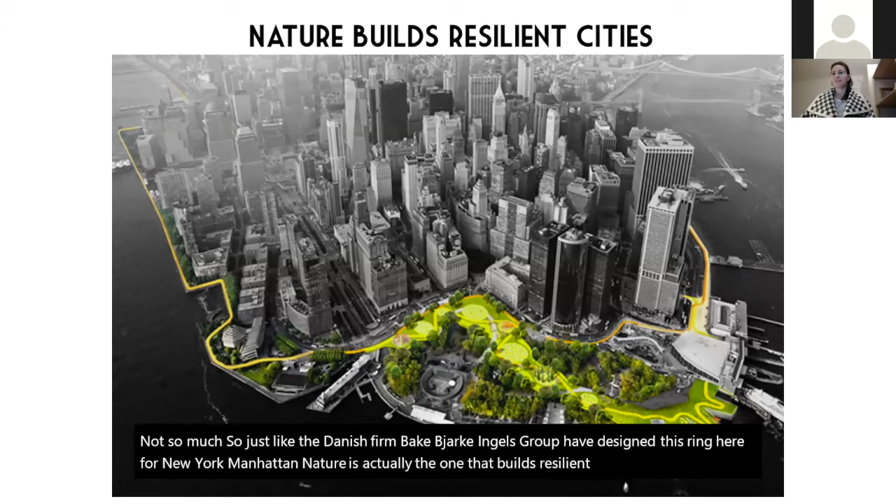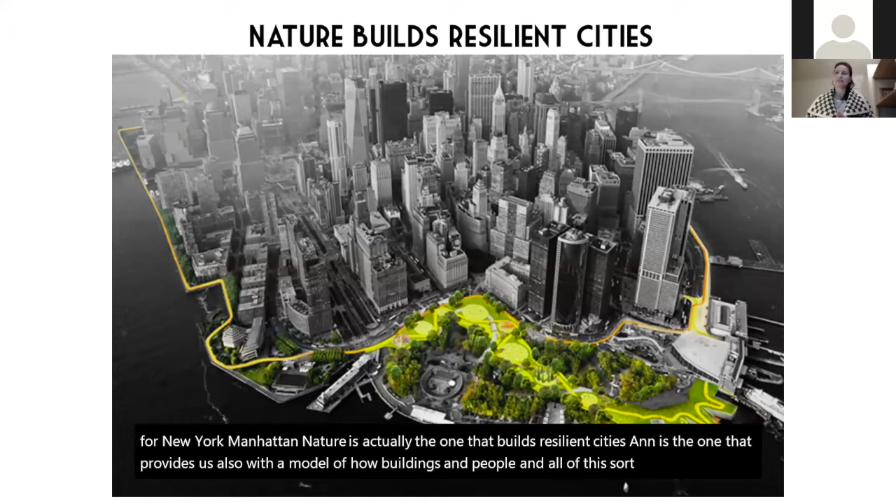But what does that mean? Does that mean that technology is sort of taking over and solving our problems? Not so much. So just like the Danish firm BIG, Bjarke Ingels Group, have designed this ring here for New York, Manhattan. Nature is actually the one that builds resilient cities and is the one that provides us with a model of how buildings and people and all of this life and activities communicate with each other and provide the information that is necessary to move the city

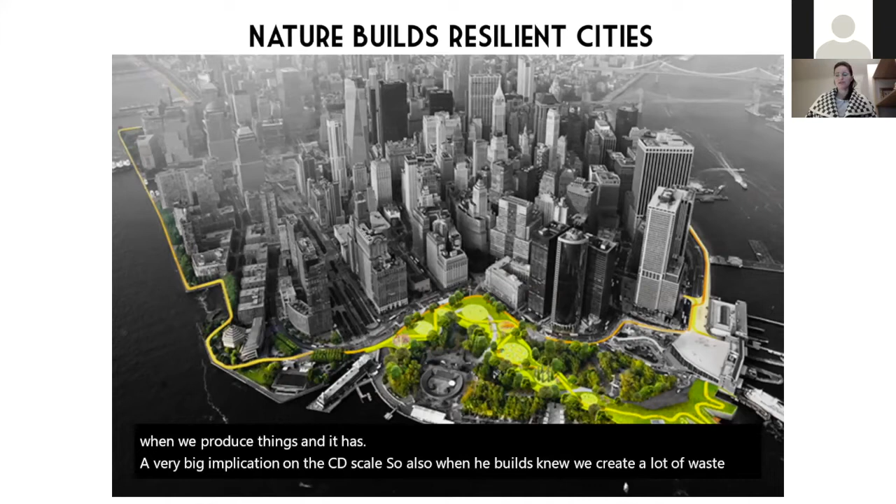into the future. And that being said, it's also important that this is done in a more efficient way, because the main issue that we have these days is this gross inefficiency when we produce things, and it has a very big implication on the city scale. So also when we build new, we create a lot of waste. And when we retrofit, it's actually saving emissions, both during and after.

So Copenhagen is focusing a lot on using nature as a tool, sort of allowing and re-inviting water into the city. We are placed on the coast, and water is a very important identity in the city's inner core and former harbor facilities. You see a lot of great photos from that, especially from summertime when you Google Copenhagen. But it's a lot into the city as well.

So the city is actually made out of different built islands, city blocks that have the buildings on the sides. And then inside you have these courtyards, sometimes bigger, sometimes smaller. And then, of course, a network of parks, which takes up a larger scale of the city. The idea first is to work with the smaller scale and to empower communities to transform these neighborhoods.

And of course, it takes a lot of communication. It takes a lot of networking. It takes a lot of infrastructure for learning from case to case and taking this to the city scale. And another one is this network of biodiversity corridors that have to be created to connect the different larger green areas so that life can actually flourish in the city as well. As you know, the bees are finding their homes in here because in the countryside there are too many pesticides and they cannot live there.

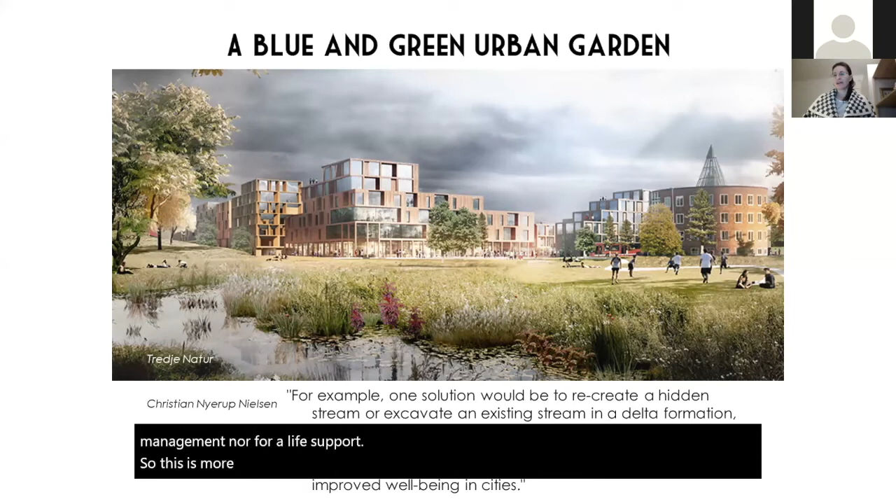So turning water into an asset, that will be the blue infrastructure. And the green infrastructure is actually inviting more nature, not just lollipop trees, but a real network of diversity when it comes to green, and reducing to a minimum the desert of grass, as we call it. That is not productive, not useful, neither for water management nor for life support. So this is more or less the Copenhagen approach, working with nature.

And then, of course, we come to this smart city idea. You'll hear that a lot of it is connected to technology, so embedding sensors everywhere and knowing a little bit where we are. But this has a lot more to do with people than it has to do with technology.

There's this idea of using the pre-existent grid. In Denmark, we have district heating, and we have all the cables for internet and phone and television. Everything that is providing our services in our households is actually to be found under the street level.

And then, of course, this is not synchronized. This is not coordinated. And every single time that you have to do either improvements in an area, or you have to climate adapt, or you have to build new, then these services have to be in top shape and they have to be installed first. But they do take up a lot of time and a big chunk of the budget because there's no coordination between the different actors.

For instance, just close to where I'm now, we have the light rail project, which will be done in 2025. It's a light rail that will connect north and south on Ring 3 of Copenhagen. So the city is growing in concentric circles, but incomplete because there's water on this side. So this will be a connection between the university and the north, and all of the different settlements in the greater area of Copenhagen, and the light rail will just run by that.

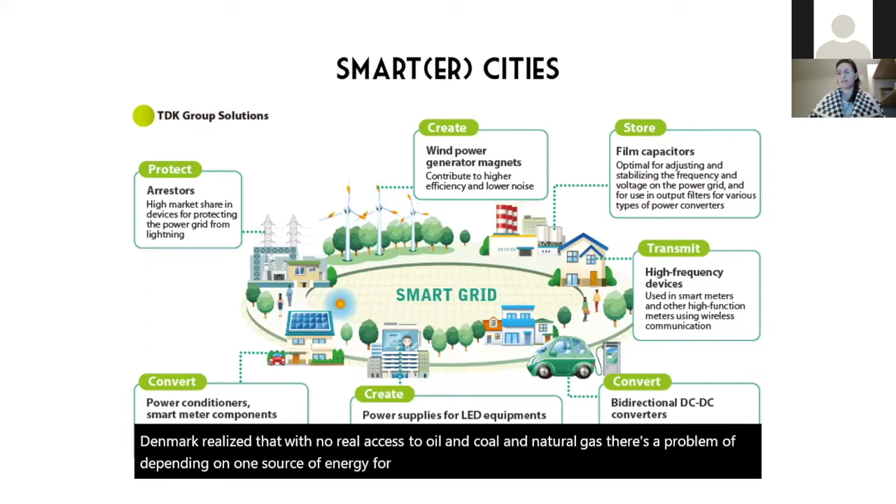And then there's also a philosophy here in Denmark, a policy that started after '73, which is the first oil crisis that actually hit development beginning after the Second World War. And Denmark realized that with no real access to oil and coal and natural gas, there's a problem of depending on one source of energy for every single part of our lives. So at that time, HOFOR, which is the main supplier for energy, had to become nonprofit.

So what does that mean? It means that every single profit that they make on selling the hot water for the district heating for our homes actually has to go back into improving that infrastructure. So every single year they have to come to zero, and they have to keep the infrastructure at a very high standard and functioning level to reduce water consumption, to reduce heat loss, and that you can only do when you have a structure like that.

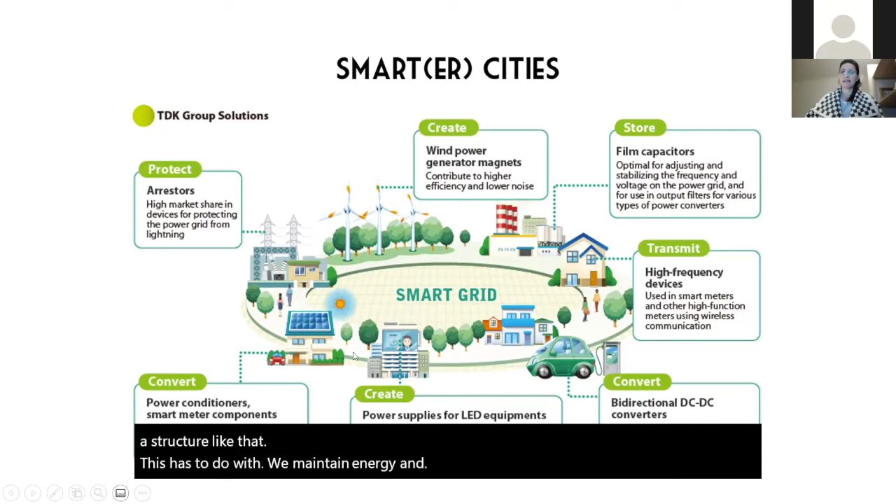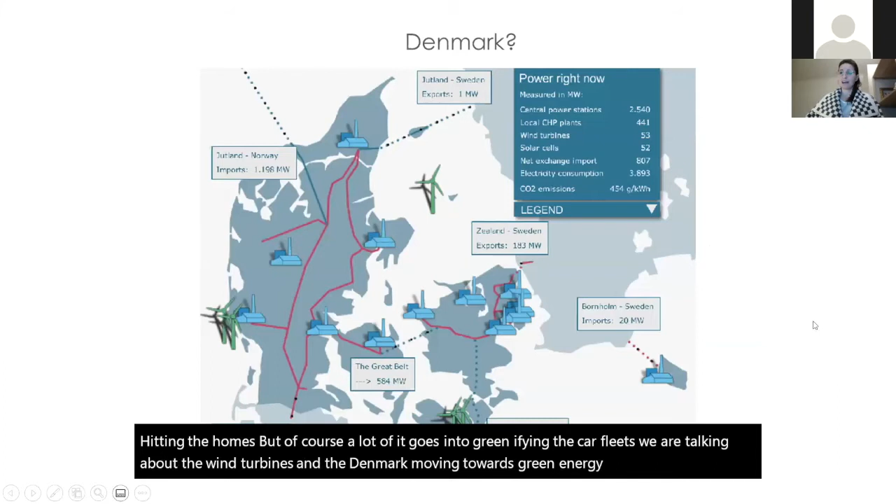So we named energy and heating the homes, but of course a lot of it goes into greenifying the car fleet. We are talking about the wind turbines and Denmark moving towards green energy. And for that we have something else which is called Energinet, and it's situated on Jutland here. I hope you can see my little arrow.

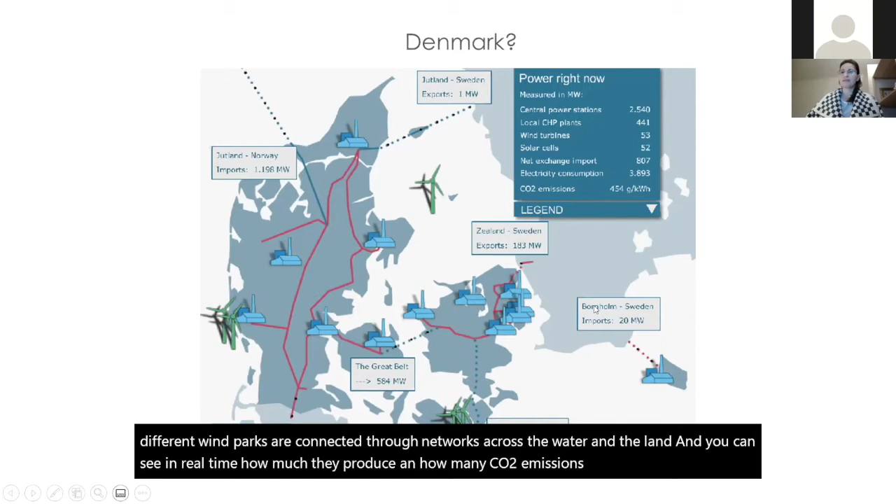And what does this do? This is actually situated in the middle of the country. And then all of the different wind parks are connected through networks across the water and the land. And you can see in real time how much they produce and how many CO2 emissions are actually saved. And there's a lot of people that also have shares in this infrastructure.

So Energinet is basically a company that is private, but it was formed by the state in the first instance. And what it does is it regulates and builds the network for the different citizens, cooperatives, or firms to connect their energy-producing windmills or wind parks.

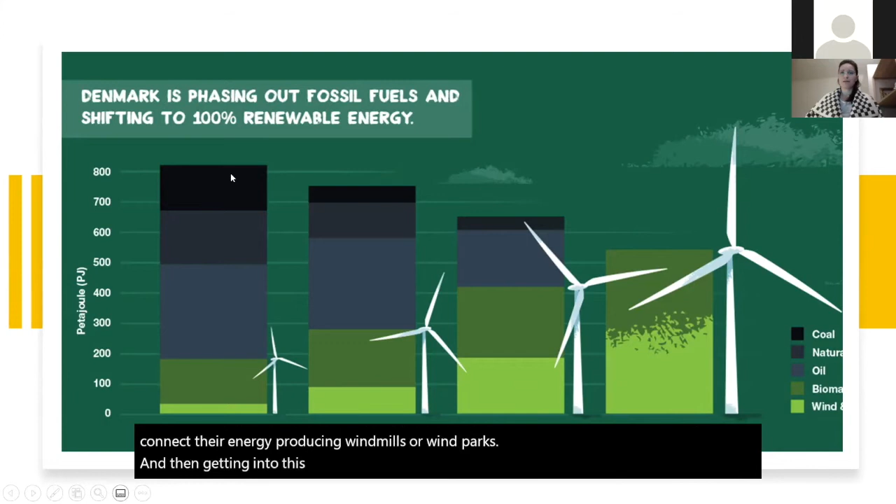And then getting into this transition, when Denmark wants to be carbon neutral in 2025. So you see in 2010 the percentages of how much the wind will cover. And you see two different colors. We have biomass as well. Another project by BIG, Bjarke Ingels Group, is taking the waste in Copenhagen and burning it to produce energy, and again, hot water that goes into our radiators to heat our homes.

And then growing in 2020 and easily replacing coal until everything is only biomass and wind. There's already big projects going on in this direction. But that being said, you have these small units that produce the energy, but you need to have a coordinated entity that can regulate the price, can provide the infrastructure, and that can only be public. So that's why Energinet exists, and it functions more or less like HOFOR does.

And this is sort of a chart to give you an idea of how much the energy consumption has been reduced, because that's also another very important part. We have to build our activities and our cities in such a way that we reduce the energy demand. That's one very important step, because, as mentioned in the beginning of this, we are not very efficient.

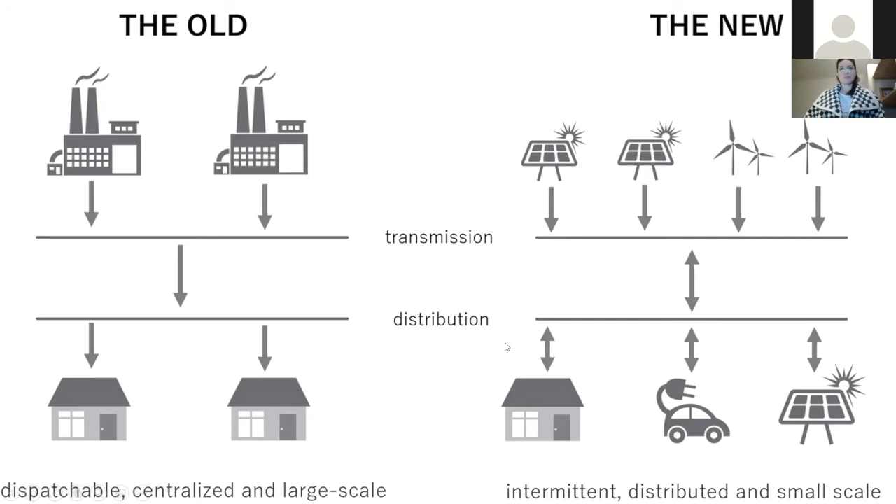And then it can provide for the households and for our mobility. So of course, this poses some technological challenges, but it needs technology and it needs people to run it. What does that look like on the city scale?

This is an example from Hamburg, where they have created this building that uses the wave energy to provide some of the electricity. It uses solar panels and photovoltaics, one for the energy and another one for the hot water, so that it is completely self-sufficient.

So today, the buildings are enormous poles of energy. They use a lot of it, and they could instead produce the energy that they need. And sometimes, depending on how much the sun is shining and how much the wind is blowing, or the waves are at high speed, they can produce energy that can be fed through the network into the city in other places where this is not possible.

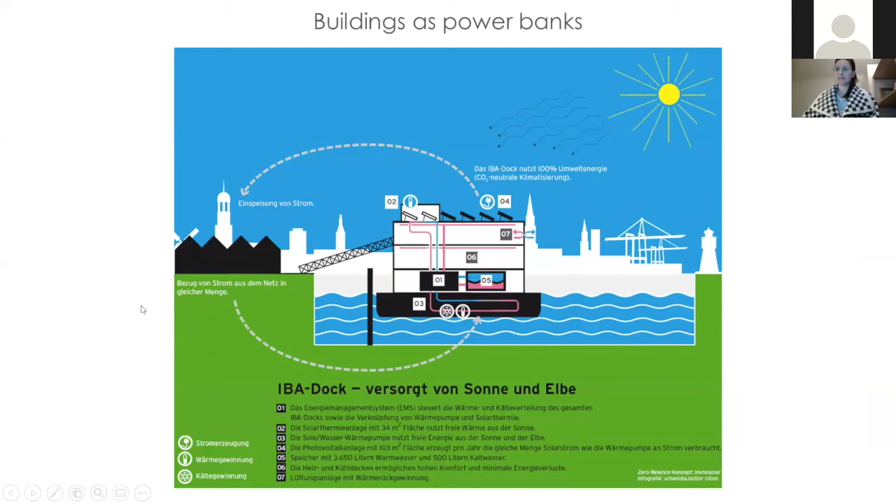The concept is more or less this sustainable by design idea, at the building scale, but this can be also extrapolated to a city level. The building is actually made out of physical elements in the structure, in the facade. And then, of course, every step of the way, there's a decision about how it will look and how it will accommodate its users.

So as well as playing with the form and the materials with the passive elements, you can also play with the active elements, which are the actual heating that you can put into the building, or the cooling. And how do you produce that energy? It can be algae facades. It can be, as illustrated here, where you take the energy from the earth, the geothermal, and heat up the building.

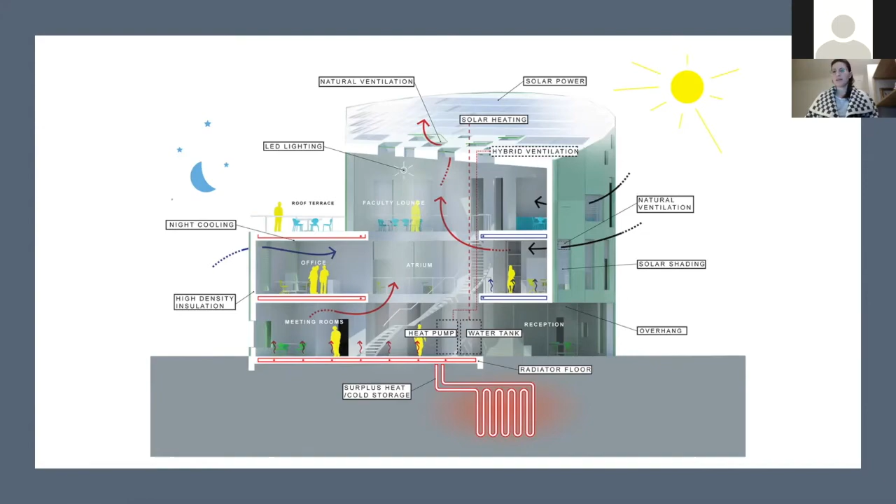At the bigger scale, of course, this also has to be coordinated, because you need to collect the energy where it's at. You can also take the shape and the form of the different city blocks and the way you design them so that you make this process much more efficient, so as not to waste the energy. So let's see how Copenhagen has done it. There are a lot of brownfield areas in the harbor part where the big industries have left the city.

There's a little bit left here in what you see in Refshaleøen, but then everything else has been transformed on the south side in the central part of the city, of the old city. And then what you see here big in red, it's actually the part that I'm going to talk about. And you see that it is huge.

So it's called Nordhavn. It's actually the Northern Harbor. And this is its location in Copenhagen. It's 2 stops away with the metro from the city center, so you can get to it very, very fast. But it has old infrastructure, road and train infrastructure, that actually separates it from an easy pedestrian and bicycle access at this point to this area.

So this area here has started being developed in 2007. There was an international competition for how to transform this from a harbor facility that has been existing since 1901. This entire area is reclaimed land. You won't see it on any older map of the city. So everything here has been filled over the years. And then what you see here in green is actually being filled up now. So the process didn't stop.

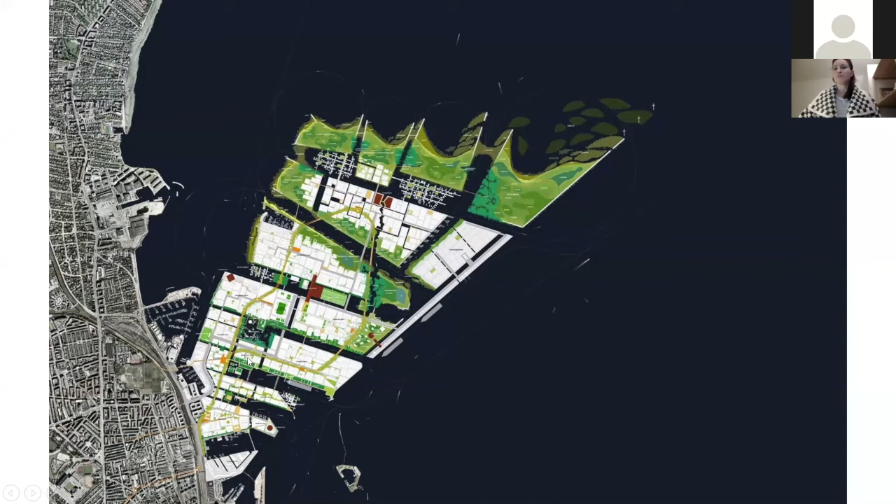This loop here is also the metro that will serve this area. So it's part of the fourth line of the metro with 2 existing stations already built at this date. And then the rest will come with the developments continuing forward. So this is also supposed to be the sustainable city of the future, Nordhavn. So this entire project has been developed around this idea of using nature as a guide. So islets and canals, blue and green city, being this city that actually preserves some of the buildings.

This is not very common in the Danish context because the work labor is actually really expensive. So the easiest thing for a lot of developers, also something that they prefer because they don't have to deal with all of the preservation and cultural thing, they just put everything down and build anew. And of course, when you do that, then you can just do a lot of the things that you would want to increase profit on selling the properties afterwards.

But this is the place where the older buildings from late 18, so closer to the city. There's also some parts from the late 1800s, but mainly from the 1900s up until Second World War. Beautiful red brick buildings, and some of the silos are kept and transformed into other activities. So keeping this identity and history, and this is a very important lesson learned from the other development that came first with the M1 and the M2.

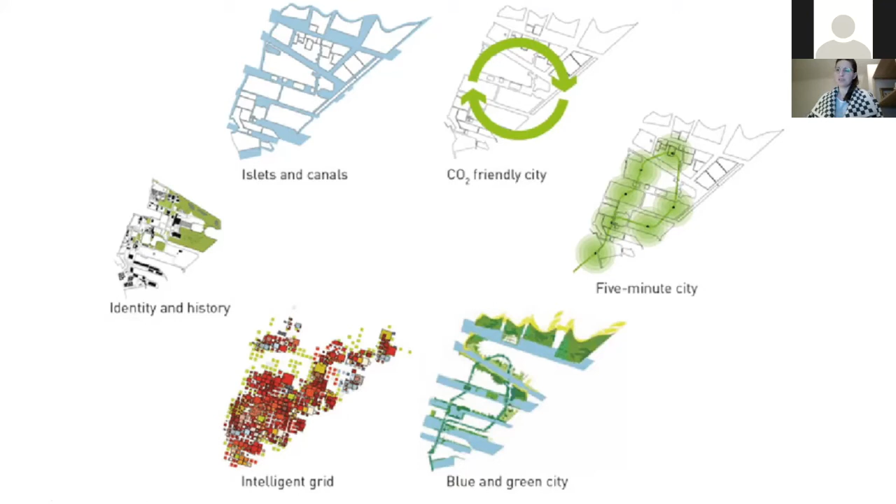cooling. Yes, cooling too. Now the wind is blowing really hard and it's quite cold outside. But summers are getting way hotter in Copenhagen, and it has been so during the past 3 years, I believe. And it's a really big change in the climate. So what does that look like?

It basically looks like, again, instead of having that big power plant, every single unit is actually contributing. You see even the little farm here with the biogas, or the networks in the city. So the facades and the roofs, they can contribute to energy and food provision. Going to come to food as well. It's not that easy to control, it's so globalized that it's not at that point where it can be easily manageable. Not at this point, and it takes a lot of political will to change that. But the city can provide a lot of space.

We have also an example of that in Copenhagen, where food, not just energy, can be produced locally, and all of the leftover space, or all of the space that is not utilized, such as the roofs or the facades, or the space in between the buildings, can serve for that. But this is mainly referring to energy at this point.

So of course we'll have some centers along the way, the nodes, to be able to connect the different infrastructures and to have this capacity of also functioning in a storm, and in the aftermath of a storm. For instance, like it happened during Sandy, where the south part of Manhattan was actually under darkness, because when everything is connected to one unit, if that unit gets damaged in such an event, then the whole city is paralyzed.

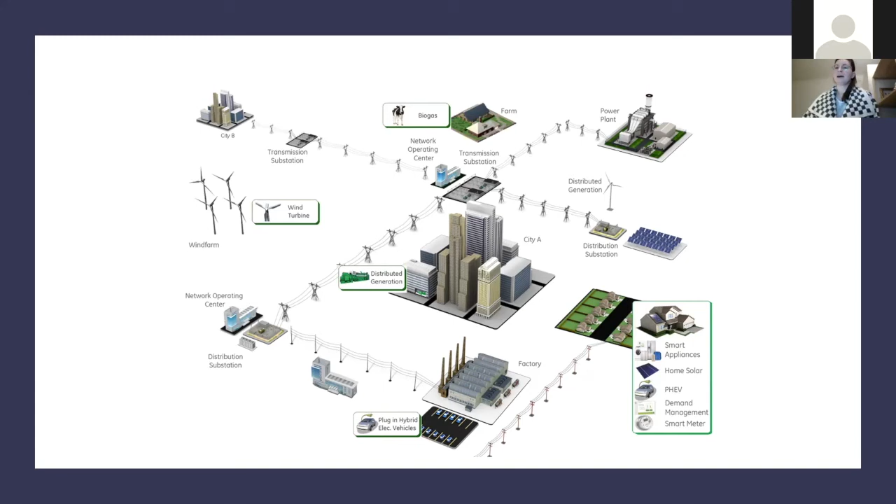And it refers, of course, a lot to the way we produce the energy. It has to come from green sources, and the way we utilize it. So everything in a house has to be smart. Smart means here more efficient. Also using what we built as an absorber of energy, just like nature is doing. And then, of course, going into mobility and empowering mobility as well, especially on a smaller scale.

In Nordhavn, it looks like this. So this is very specific to that. It actually uses surface water, streets and gray water to filter and use it locally. So having the nature elements that are cleaning the water on the spot, and then it can be released into the harbor. And then, of course, black waters are actually going to the cleaning plant.

But here we're talking about the water that comes from the roofs and all of the water that is just passing through the area, and it's just costing the city much more energy, so cleaning the water locally, referring to the gray water.

Also using cooling, but not in the sense of air conditioning, but using the water from the sea, because the sea here has a constant temperature more or less all the way throughout the year. Now the temperature during the day goes from 2 degrees, I'm talking Celsius, so 2 to 8, 9, and then it goes back again during the night, but the water stays at 9 degrees.

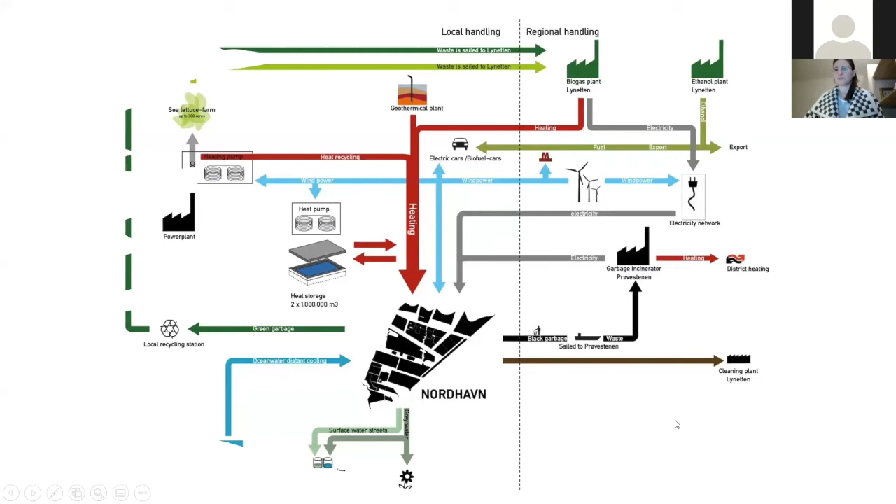So a lot of this waste and newly produced sea lettuce with the CO2 locally actually gets to be transformed into energy again. But I think it's obvious from this scheme as well that it's necessary to have this network and to have this overall thought of who does what and how do we collect, involving all the different parts in here, all the different actors, right? Because this model cannot function otherwise.

The beautiful example of this model, it's called the circular economy, and it's also called the Copenhagen model of passing from this collaborative to a neoliberal planning system, where this is opening up to the markets and the profit markets, is that this reclaimed land now can grow, because when you build a metro in the city center, it has to go in the ground. So you have to dig tunnels, and you have to do something with that earth, right?

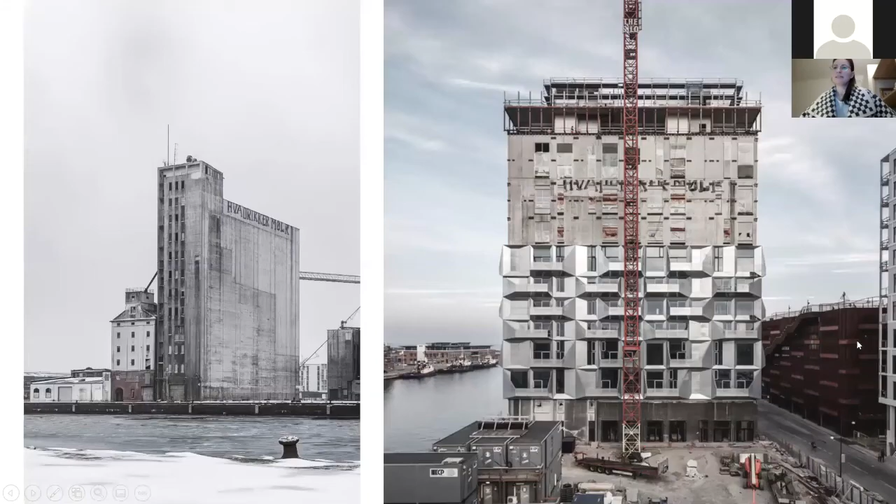So this is focus on the buildings. When we come to the energy part on the left here, you see the old corn silo that was not torn down, as is the tradition in Denmark, but it was actually kept. And you see it here to the right being transformed to apartments. And because it is so different, it has all of this extraordinary living situation surrounded by water, and so high up.

In Copenhagen, we have buildings of 5 to 6 stories high, and it's a city that incentivizes movement and walking up and down the stairs, and walking in between the buildings, and biking to keep the population healthy. This is actually a very different model. So the silo has been transformed into apartments that go from, I believe the smallest is 1,200 square feet, and the biggest one on the top here is around 4,000 square feet, so that you have a bit of an idea.

And the energy here saved is enormous, because as I mentioned before, every single building has to clear the site, has to build the foundations. And in Copenhagen, this requires a lot of energy, because the groundwater is actually really high, and you have to pump it out of the building site 24/7 before you finish raising the basement and the foundations, and then you start building above the ground. So this requires an enormous amount of energy.

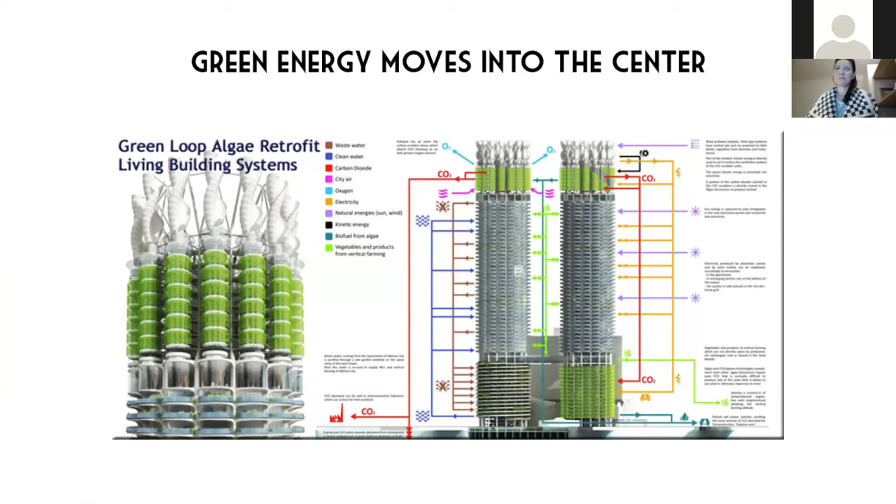Another example was using buildings as energy providers. And of course, they have to be connected to the network to feed in energy and take energy when they need it. So call it green energy moves into the city center, and it looks like this. This is one example from Nordhavn.

And it also collects rainwater so that toilets are using that. We don't flush it with the clean drinkable water. We actually flush it with the rainwater in here. And this is supposed to be, again, another idea and another invitation of thinking this further. This is not as such an integrated design as we saw previously, since the panels are added on the roof and not an integral part of the facade, but it's way better than a regular building that is consuming.

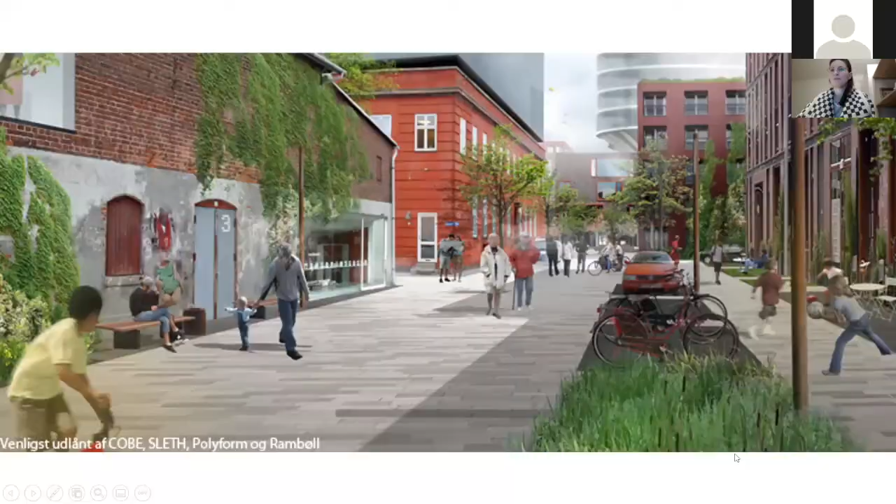This is one, and we're looking forward to the next ones, and hopefully we're going to get to that dream. So this is again the atmosphere from that place where the bicycle comes first, and public spaces and waterfronts are actually public domains, and everything is connected on this level and made for people movement. And you see some temporary parking spots in here. And these are some of the renderings.

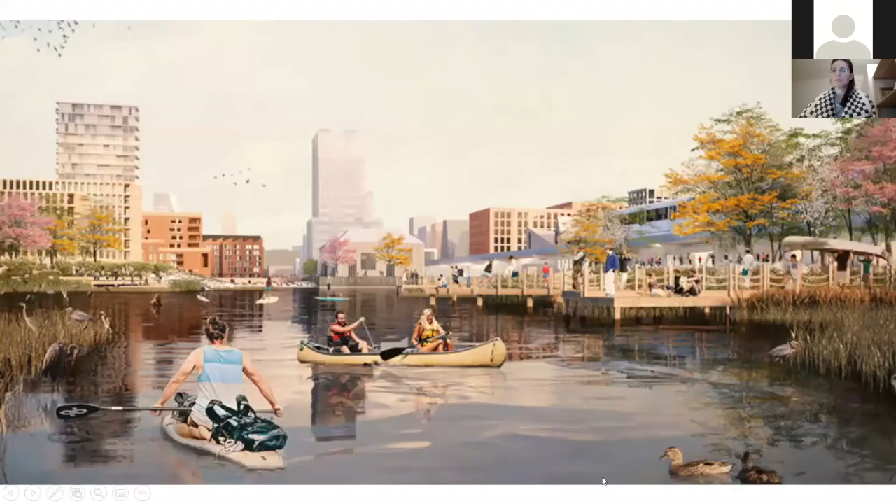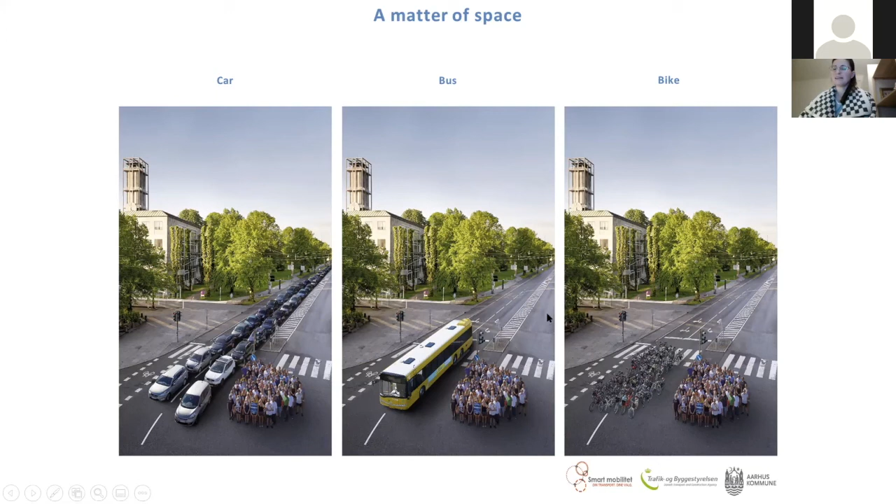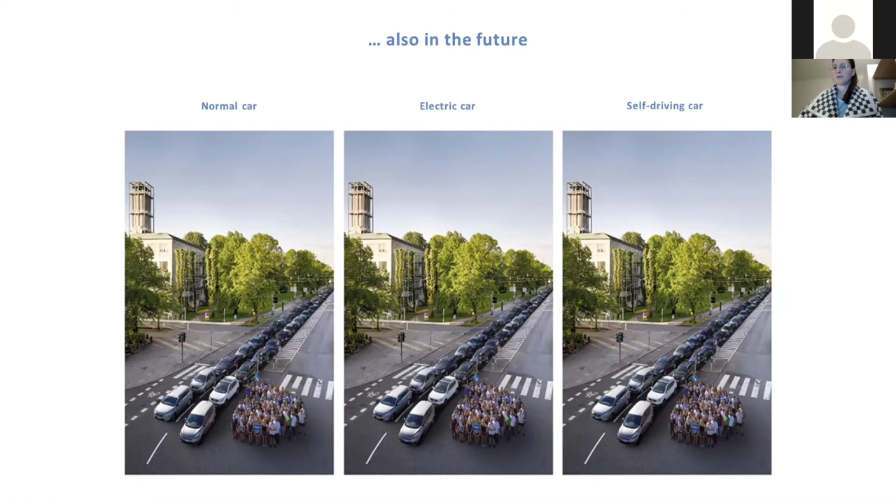And the paradigm is actually working towards this, right? So electric car, self-driving car, and here we're talking technology, and pure transformation of the old paradigm, just changing the car fleet and having the infrastructure for that. But it's still a matter of space when we talk about this. A better way of dealing with this, and the one implemented in Nordhavn mainly, is looking more at the flow on the street, because now we have traffic jams.

We've seen that when we create more road space, more cars come, and every single time we find ourselves in this gridlock situation, and it's becoming worse and worse in the bigger European cities, in the States, all over the globe. So rather than looking at the vehicle that is way bigger and heavier than we are, just to transport one person on a daily basis and be stationary 95% of the time, looking more at the capacity per hour and the space that is occupied by every single piece of infrastructure. So down here you see the space utilized by different modes of transportation, and up here you see the capacity.

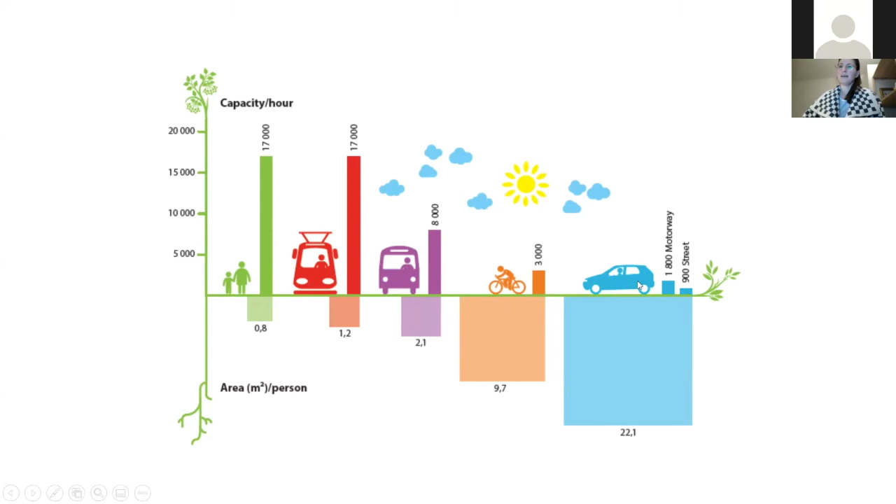So it's a very easy decision on how to move people and also how to create cities, because again, you have to build them in this mindset of transit-oriented development, and you have to build them with mobility in mind, because otherwise it will be very difficult to reverse that. For instance, when you have a very sprawled, low-density city infrastructure or settlement infrastructure, then of course you cannot pay for some of these more expensive train projects. It will be more towards the car.

Nordhavn has this little toy here as another test. Again, it's a laboratory for energy and for technology and human life. It has this electric driverless bus that goes around the block. So this is the Århusgade neighborhood. And then it goes around this, because this is still a test. It's the second city in Denmark that has this. Aalborg was the first one to have it.

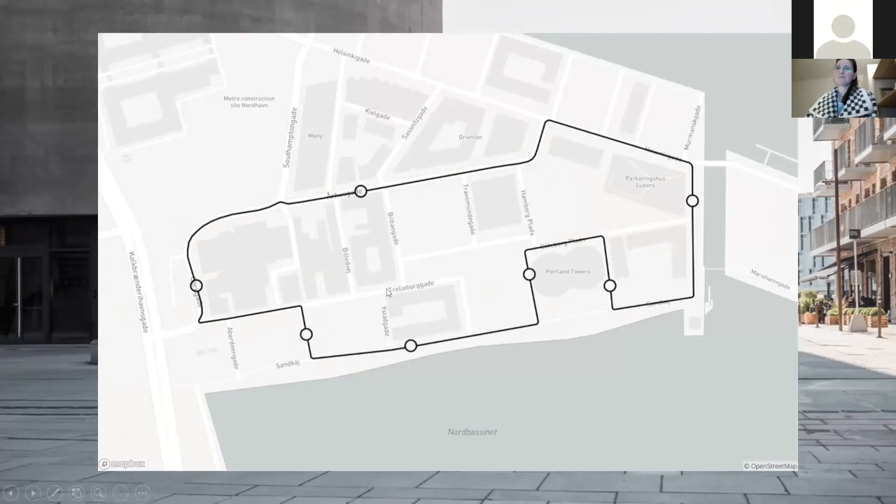And this is also collecting data. So it's not just moving people around, but it can use this capacity of collecting data on traffic, collecting data on the infrastructure, what comes on the road, and then feeding that into the system to improve the service.

So for the street traffic, when we talk smart cities, it's mainly infrastructure on how to improve the flow, so synchronize the lights. It actually made a huge difference in saving up to 15 minutes on a daily basis on the major arteries of the city. But for public transportation, it has actually shortened travel time by 5, 10 to 30 minutes, depending on where you are, and provided 85% of the Copenhageners in the inner part of the city access directly to a metro within 5 to 10 minutes.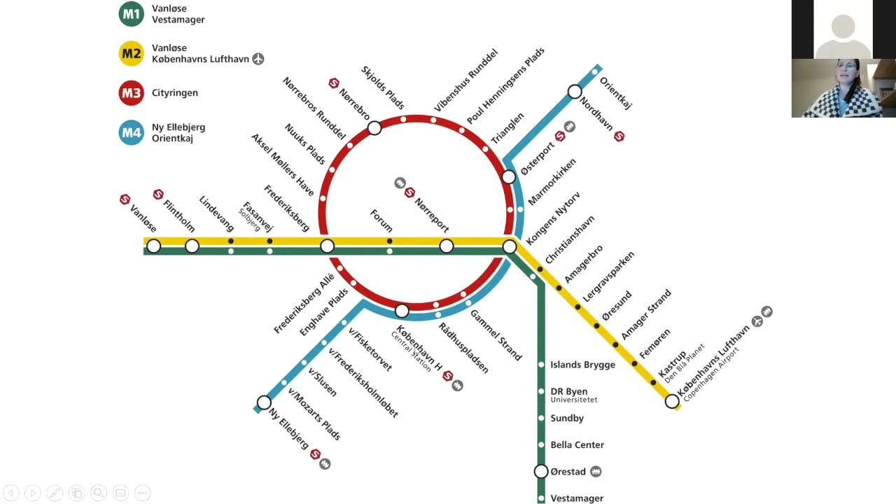So this has been a massive project, but its importance lies in connecting with the S-train infrastructure. As you see here, the different station names, and they have an S. This is the S-train, and it connects across. And then this is not to stop here. This project will continue. So this is from in between Orientkaj and Nordhavn.

It doesn't want to run. Technology has failed me today.

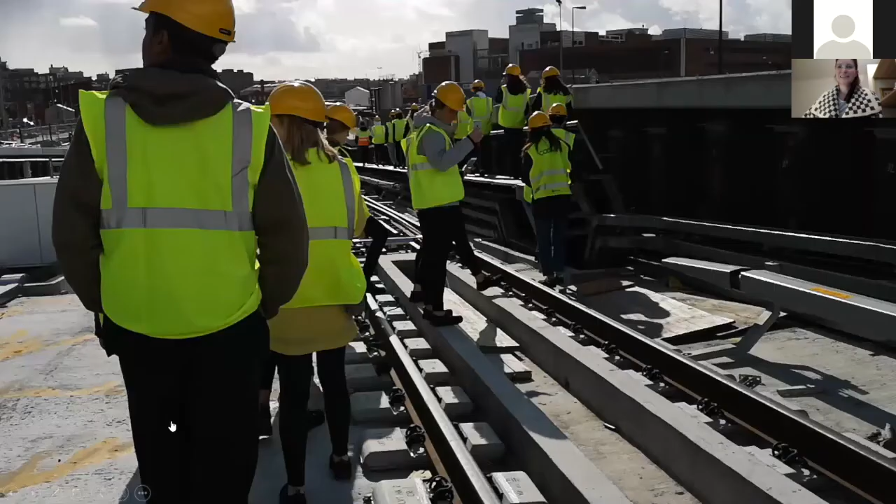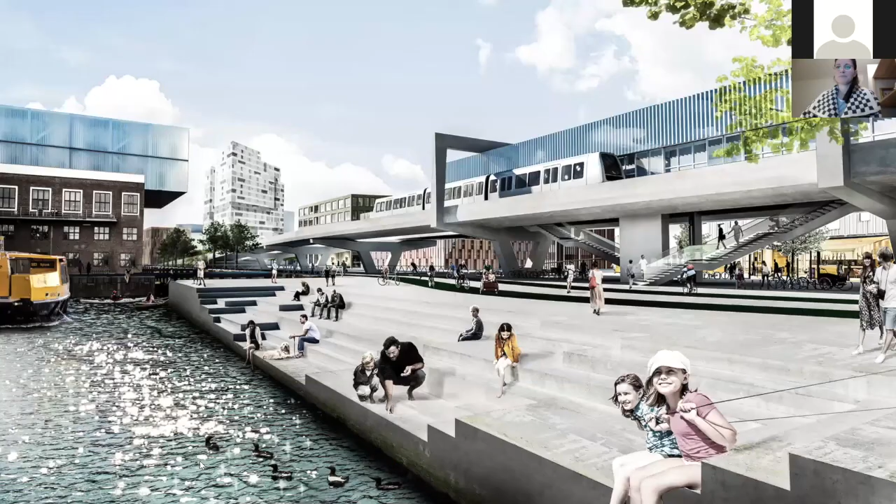I apologize for that. But this is actually when we have been on site and see exactly how the system has to work, because it's a driverless metro. It's a light metro. It relies on frequency. So you have these above-ground tracks wherever the city is lower in density and can provide space for it to be built, but otherwise it goes underground. And from the outside, the stations are looking like this. Again, using a different design in this area rather than in the rest of the city.

But here it is very crucial that the technology and the people behind the technology are actually up to 100% in the Center for Traffic Control. When you have 2 lines of metro, the efficiency of it was 99%. And when you add more lines, then it gets more complicated when you have to coordinate this driverless system that runs every 2 minutes. And of course, it's important to understand as well how many people use this so that constant improvement is fed into the system and it functions for the best.